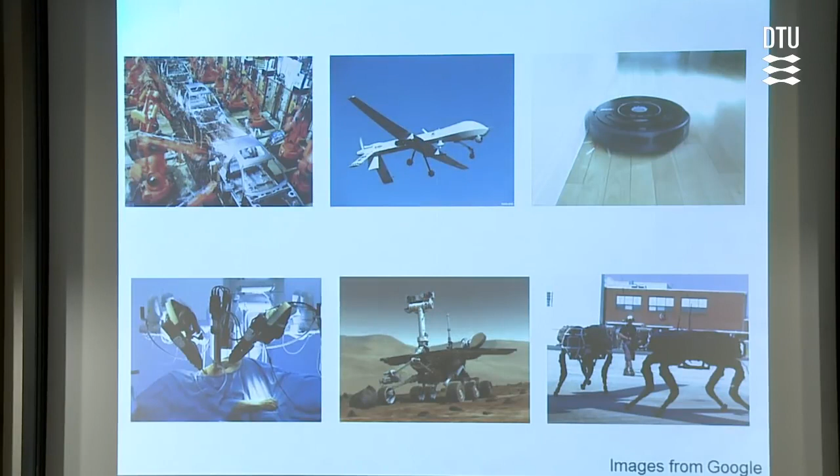Here are robots, and you're familiar with all of these in one fashion or another. Just a couple of points I want to make about them. This is an assembly line, and these are robots involved in the assembly. The characteristic of these systems is that you cannot come anywhere near them. There's a fence you don't see around this, but when one of these arms swings - it's accustomed to holding an automobile - if you happened to be there, it would go through you as if you weren't there and not even notice. So these are decidedly not collaborative.

The military has, of course, been very good at drones, and a drone is just an airborne robot. This is an effort to make a consumer robot - this is the so-called Roomba, which is an exceedingly stupid and inefficient way of trying to sweep the floor. This is a picture of the so-called Da Vinci surgical robot, which may or may not give better surgery, but it certainly enables higher billing. So it's a good thing in a capitalist universe.

This is a robot which is of entirely legitimate use. Human beings cannot presently go here, and I'm going to show you a little bit more about the equivalent of this in just a second. But I want to make this point before we begin - this has to do with the question of whether robots are intrinsically a bad idea.

I would point to early robots, otherwise known as machines - dishwashers and washing machines - which took half of the population, otherwise known as women, and released them from the task of washing dirty diapers and dirty dishes, and made them into teachers and CEOs and whatever they might be. So this was a case in which machines didn't compete but cooperated. They eliminated an unattractive job and replaced it with much more interesting and attractive jobs. So it can be good. It's a question of how you use these machines and how clever we are.

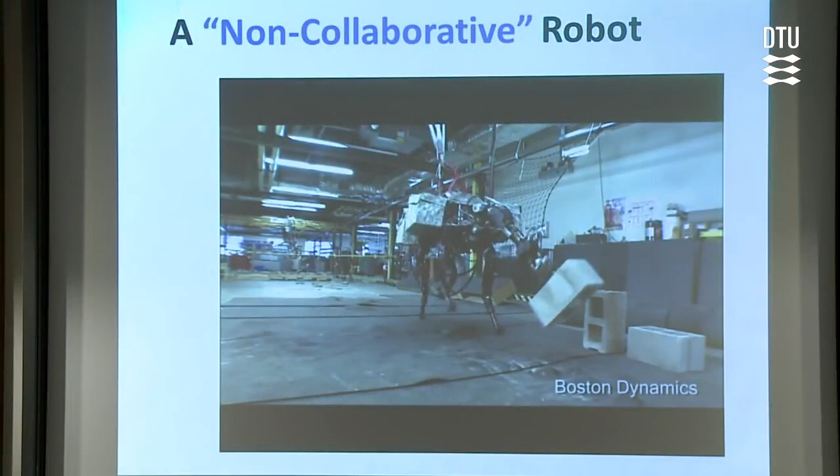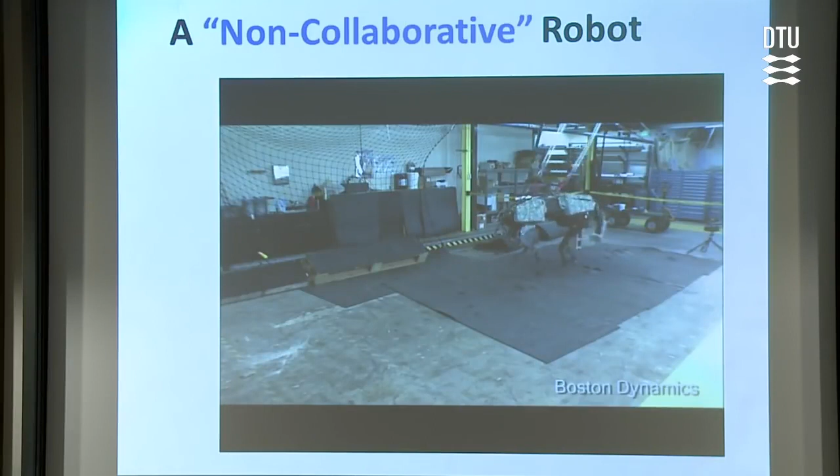This is not what you want as a babysitter. But there's a point here that I want you to look at carefully - look at the grace with which this thing balances, shifts its weight. It's just unbelievable. I mean, with my cataracts, I can't tell whether that's alive or not alive. It, in some ways, is better alive.

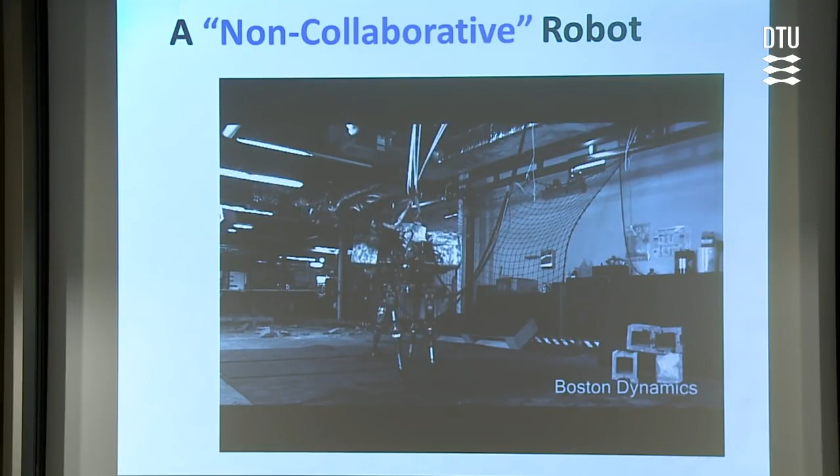But the underlying issue is that if you look at that kind of development - remember, that doesn't have a brain. All it has is a series of accelerometers and things of that kind. So without any control systems at all, other than the most primitive feedback loops, it does things that I can't tell are not something an animal does.

Now you take that and you couple it with artificial intelligence, and all of a sudden you begin to see a pathway to something - not next year, but something in the next 50 years - that begins to look a lot like us. There's a deep, really important underlying question here: if a system becomes sufficiently complicated that it has the power of advanced information processors, the knowledge of the web, the ability to move autonomously, the ability in various ways to improve itself, it can arguably be set on a pathway for independent evolution. I don't know whether this is going to happen, but I don't think it's just a question of trivial machines. It's more interesting than that.

So, here's where we started. Now you say, what on earth does that have to do with anything? With much of technology, it started with the military.

Our friends in DARPA were interested in developing a system that looked like a Coke can and would have the characteristic that on command, it would unfold into something that would autonomously walk across the floor, find a door, crawl under the door through the crack at the bottom, and then reassemble itself into something that looked like a Coke can on the other side. Now, you can see why they might be interested in that. You can understand that I might not be particularly interested in that, but many aspects of the technology of doing that have turned out to be very interesting and very practical to look at.

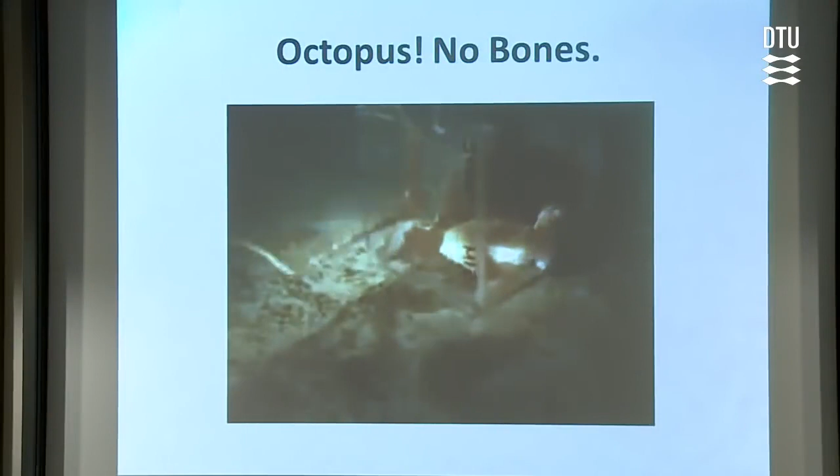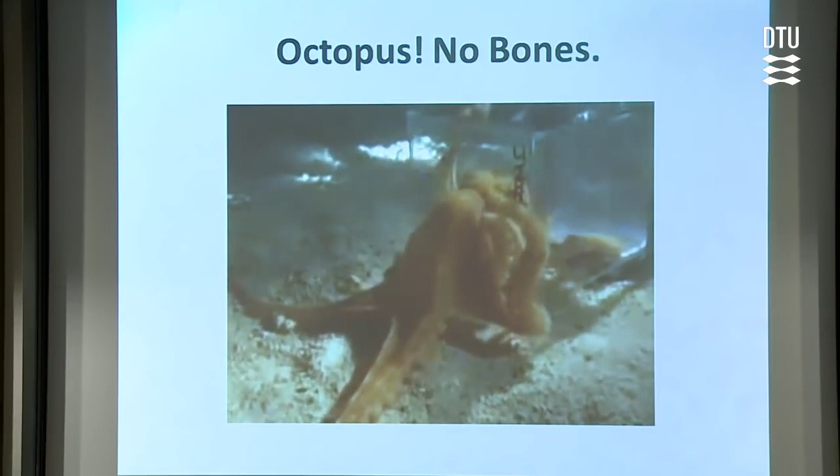Now, to do that, you need always a model, and here is our model. I just think this is among the most fabulous of organisms. This is an octopus, and this octopus is, as you can see, squeezing through a hole much smaller than the octopus, including squeezing its brain, which is apparently pretty plastic. And I would note that we couldn't do any of that, or at least not without severe damage. So here's something that can do something that we can't do.

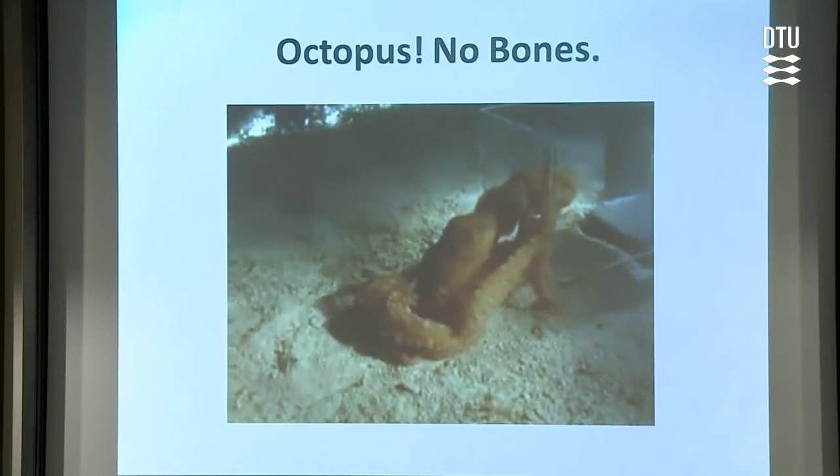And once it does it, I want you to finally see it's there. Look at that look of intense self-satisfaction. But this is a model.

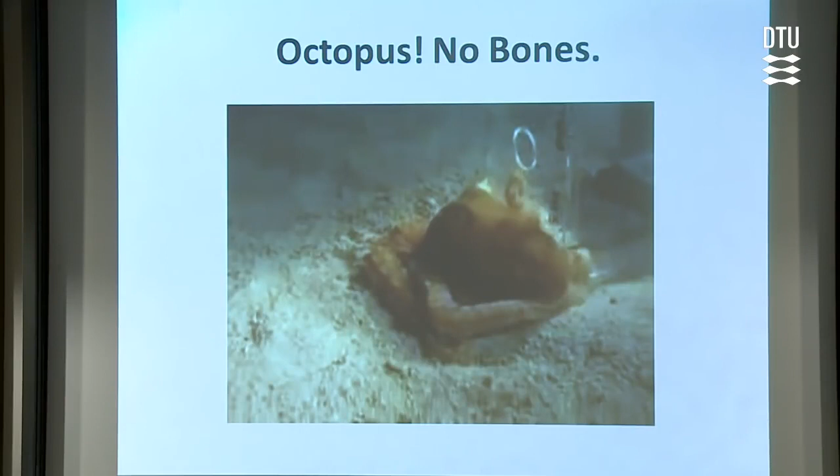The point in this is that the reason I have a skeleton and stuff like this is that I'm designed to withstand the forces of a gravitational field. An octopus doesn't need that because there's effectively no gravity if you're at buoyant density. But there's no real reason why I need that, except for the fact that this was an evolutionary solution. It could be done in other ways. So we're going to start with things that are fairly soft, but they nonetheless move around quite handsomely in a gravitational environment.

Here is the other of our motivations, and that's simply a bicep. It's not, for those of you who lift weights, a particularly impressive bicep. But the fact is that after 50 years of trying, there's nothing that really replicates the function of a muscle in the sense that it's a linear actuator that operates pretty rapidly, pretty efficiently, but doesn't in fact change volume very much. So we're interested in octopi and we're interested in muscles, not in replicating the mechanism of muscles, but the function of muscles.

Now let me start with this picture, which illustrates a lot of what's going on. That is a raw egg down there, and this is an early gripper. This was the very first thing that we published in this area, just to give you a sense of timeline, which is 2011. And the technology itself is as simple as it could possibly be. It's simply, effectively, a balloon over here, an elastomer with an empty chamber on the inside. You pressurize it, and if there is a layer here that has the characteristic that it can bend but not stretch, as this expands in volume, it causes that to bend. A really trivial idea.

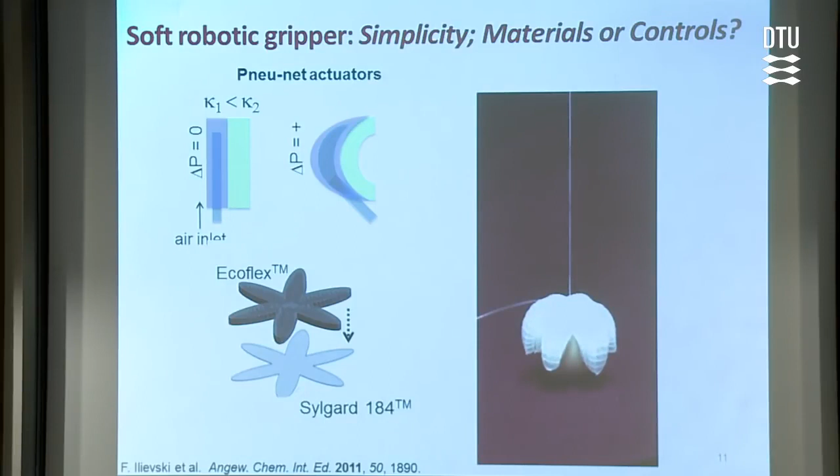We make this in a straightforward process that I'll show you in a moment. But what's neat about this is just to pick it up and lower it, and this is the input line for pneumatic pressure here. When this thing wraps itself around, it's very hard to get a hard robot to do because you have to have sensors that tell you that you're not breaking the crush strength of the shell. But here, because the pressure is distributed uniformly across all the contact area, all you have to do is regulate one pressure, which is the input pressure, and you're done. It's a first step in something really interesting, which is what it does is use the properties of materials and design to replace complex sensors, feedback loops, and controllers. So it's a device which simplifies the technology.

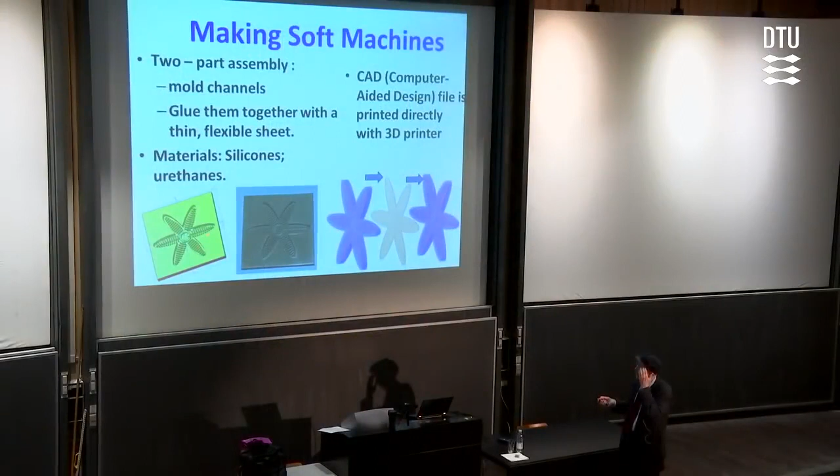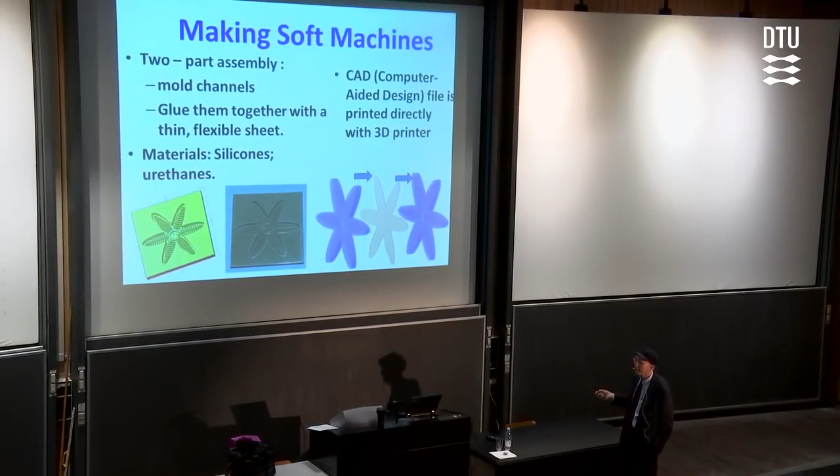So how do we make it? A lot of this came out of our work in microfluidics. What we do is simply design a mold, which in our case usually contains a number of small chambers, little bubbles, for a variety of reasons. We print it using a 3D printer. This might take a day for a complex mold. But then we mold a flexible silicone rubber against that. We put in some kind of layer that gives us the kinds of mechanical properties that we want. We glue these together with a bottom on it, and it's done. So it takes essentially no brains to do it. We like things with no brains.

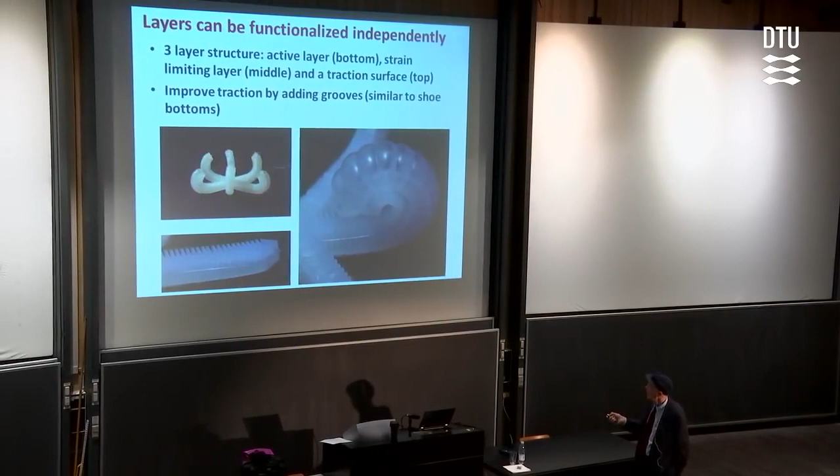I want to give you a hint of something. As this gripper blows up, you can see the little chambers that represent the arm here. But the other thing I want you to look at is it starts to curl up from the end even though the pressure is uniform throughout that system. And why does that happen? There's actually very interesting science associated with that.

It's also easy to take these things and mold on the inside structures of that kind which improve adhesion, if you want to do that. It's a very flexible technology.

Now there are other things that make it interesting, and here's one. This is a related structure, the same kind of thing, but now in the shape of a hand. It comes down and grips the egg, and we've made this a little bit more complicated in terms of internal structure. You can see the fingers are almost articulated, they have a joint-like activity. It puts it down without crushing it, and that's all fine. It gets its finger stuck there, but not to worry about.

But here's the thing that's more interesting. This differentiates it from hard robots. That's a mallet. And you pound on it, and this would break a hard robot of that sort, but just to give you a sense that this is real, after you do that it works just fine. In fact, these are sufficiently light that you can throw them off an arbitrary building. It doesn't make any difference, they're undamaged. They never reach a velocity that will cause impact damage on them. So they're essentially unbreakable to most blunt trauma. They can be cut without much trouble. Hard robots can't be cut, but they're very, very easily damaged by blunt trauma.

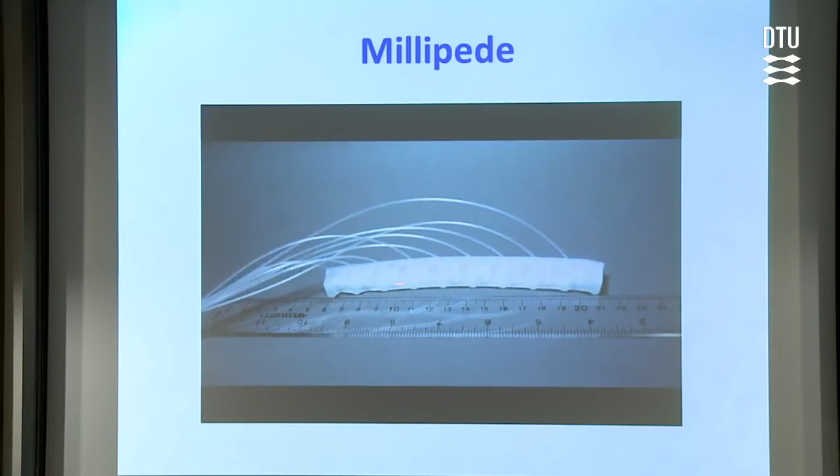And then you can make a whole bunch of other things. Here's something which is a millipede-like object, and here's an example for those of you who like problems, which is neat. We do this by pressurizing each one of these in turn. How would you make this all work with just one input here? And the answer is, we don't know right now.

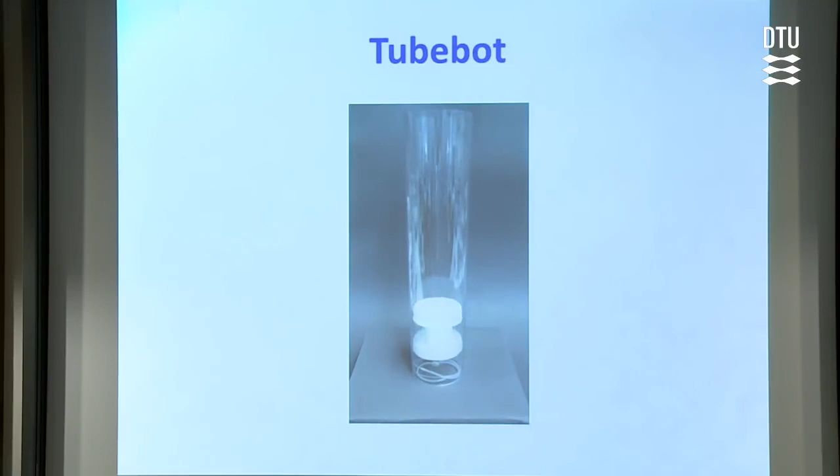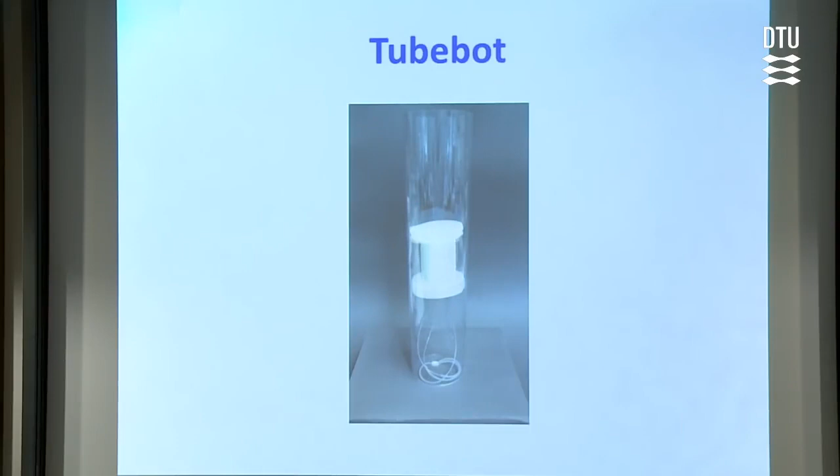Here is another device which enables you to crawl up the inside of a tube, if you want to crawl up the inside of a tube. Perhaps you don't want to, but this is doubtless useful for something. There are people already trying to think about using these to clean out sewers and pipelines and things like that.

Now these are all widgets which are pretty interesting. I want to talk about one bit of mechanics here, and it has to do with two components. One is what's called snap-through, which is a bistability, and you see that in little things that kids have - a sort of a bubble shape, and you push on it, it pops through to the other side. Both are stable, but they're metastable in either phase. So I want to briefly talk about snap-through and then also about beam buckling. This is much more sophisticated and quite interesting, actually. It's got the mechanics people all excited.

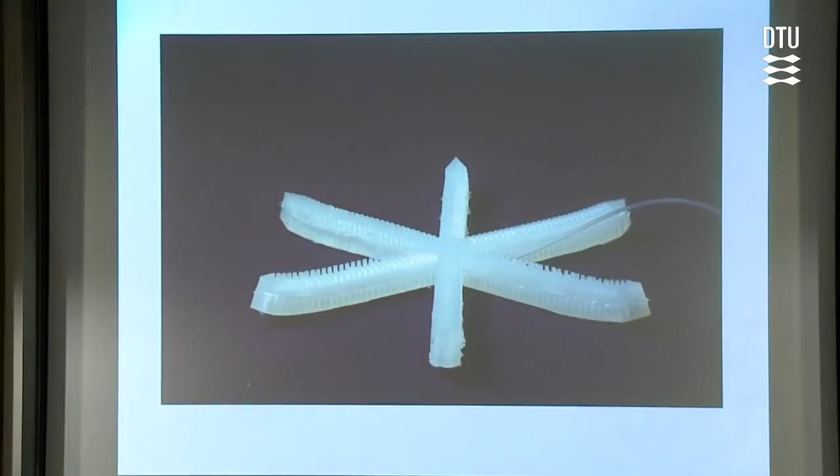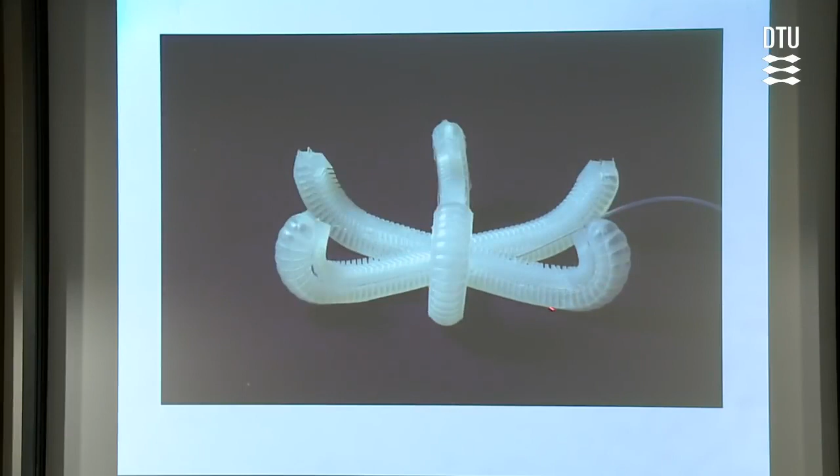So what's going on here? This is an example of snap-through. What happens here is that as you pressurize this structure, the pieces at the end expand all the way before the ones in here do. So you have a system in which you pressurize this entire arm, but because of an instability in the system, the pressurization here leads to curling before the system here curls.

This is, again, an example of using design and materials to get around the problems that you would have with conventional controllers. Trying to achieve a motion of that complexity with electric motors and reels and things of this sort would be a major problem. Here it's just a trivial outcome of the basic design. And all of this, incidentally, you can vary these properties by varying the mechanical properties of this and the structure of the pneumatic chambers and things of that kind.

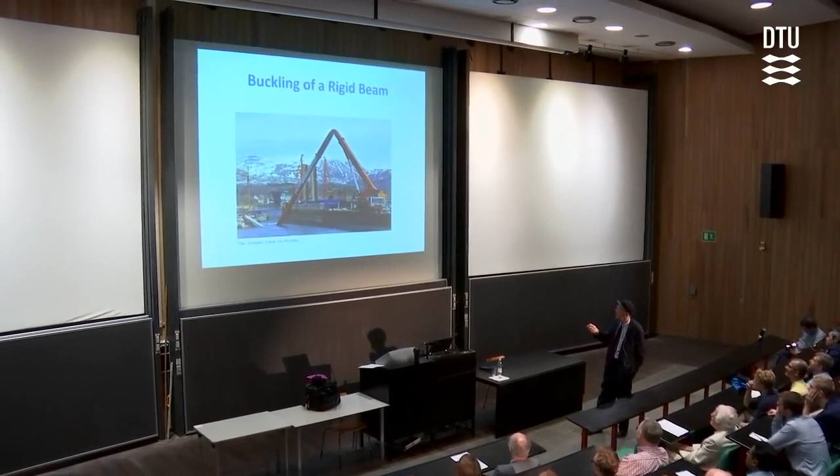Now here's an example of beam buckling. And this was apparently - you can see over here - this was a heavy lift crane, which I would suspect somebody got a little bit more ambitious than they should and picked up something which caused it to buckle at that point.

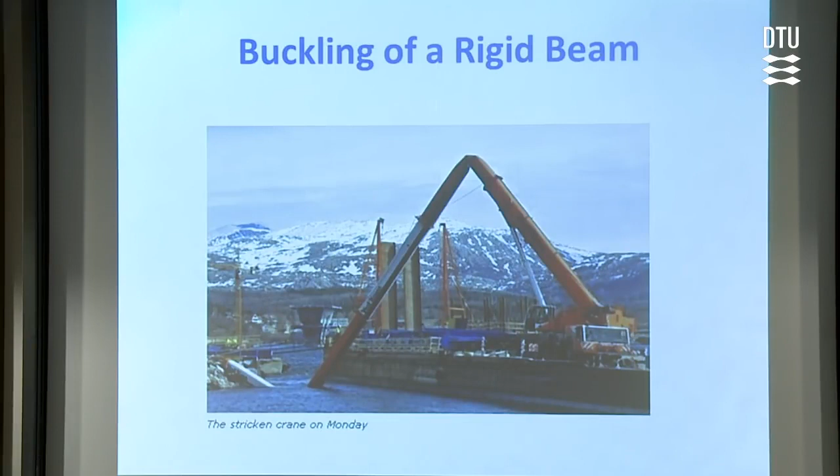What's characteristic of this with a rigid material is once it's buckled, it's failed. You see this in concrete pillars. You push and push and nothing happens, and then it buckles, and when it's buckled, it's failed. With elastomers, that doesn't happen.

Now, I don't know what's going to happen when I do that. Let me go back and find this on my computer.

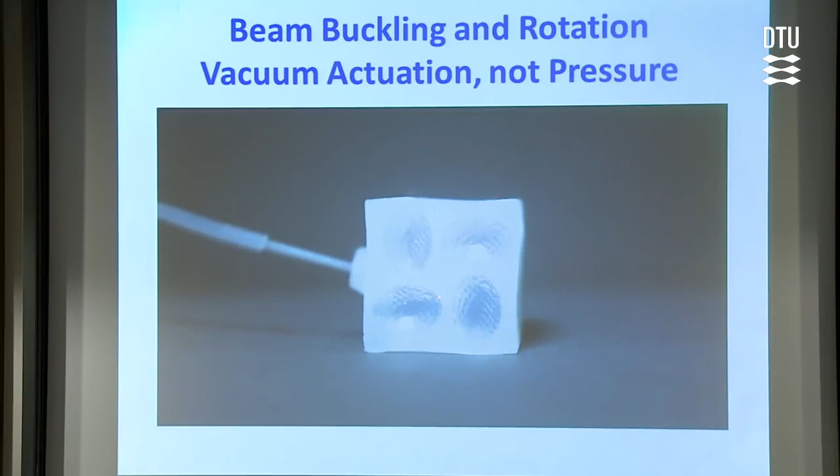So what you're seeing here is a rotary motion. I've converted the linear motion I showed in other things into a rotary motion. And you can begin to do all kinds of interesting things with this.

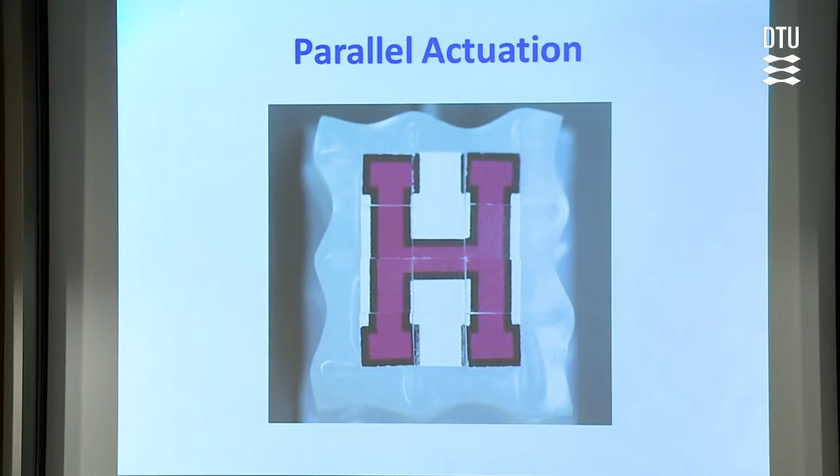I'll show you one here. This is a single input, a single source of vacuum, leading to massively parallel motion, which in this case orients a bunch of disks or plaques. This would be very hard to do in a system as simple as this one if it were rigid. So by this kind of beam buckling, it's possible to get some very interesting structures.

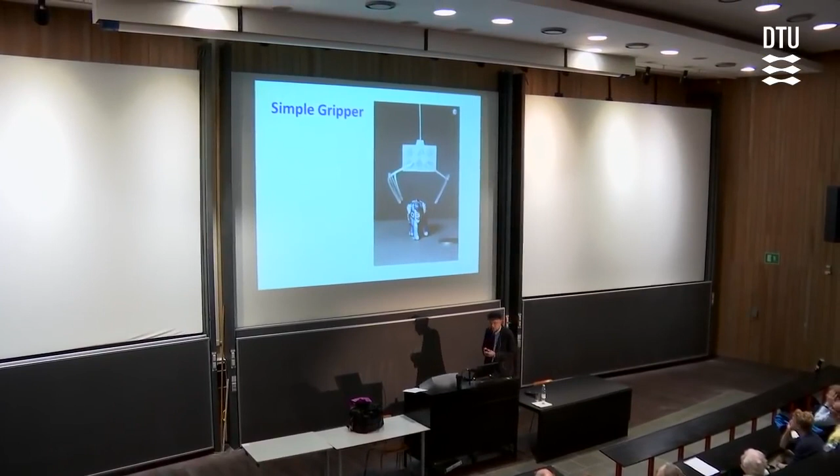Here's another one. This one again requires this. The reason for pausing on this is that what you see here, this part is going to rotate in that direction, and this part is going to rotate in that direction, because of the symmetry of this series of holes here with ellipses of different orientation. When you do that, what happens with a single vacuum input is this.

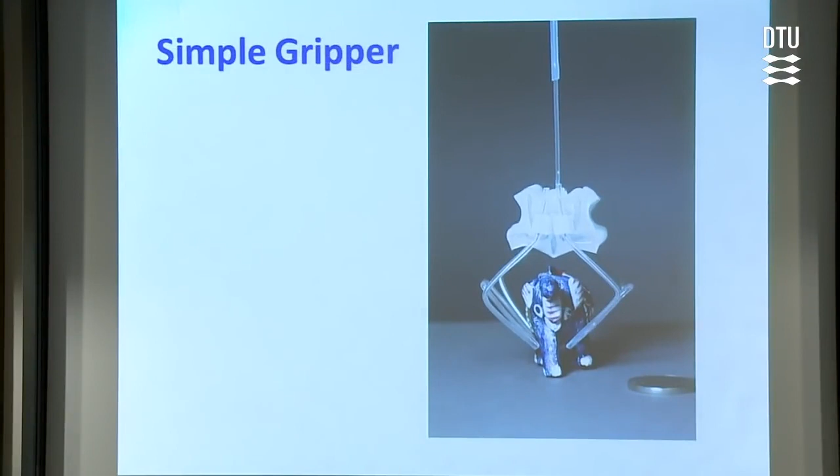Collapses, grabs, and picks up. So, quite a sophisticated motion for just one pressure.

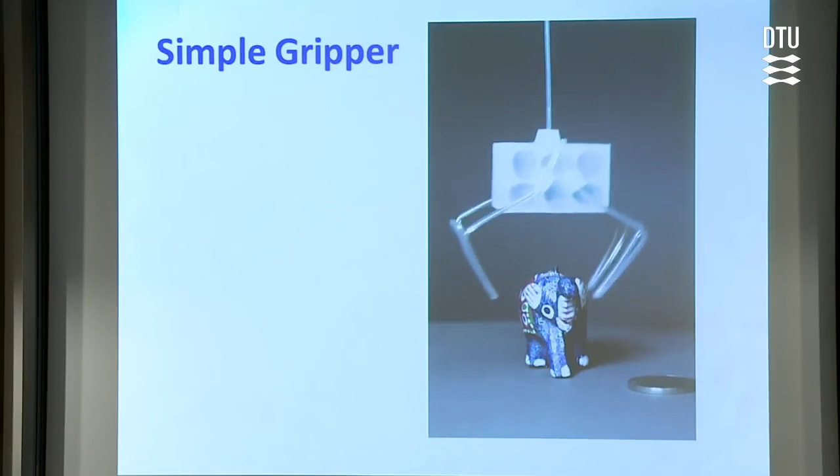And the nice thing about negative pressure is that it's prototypically cooperative because it can't blow up — you're just sucking in. So you can have this kind of thing embedded in you, and there's really no risk of exceeding an overpressure and having it explode in your abdomen. Not a good idea, but this just can't do it. So it's intrinsically safe.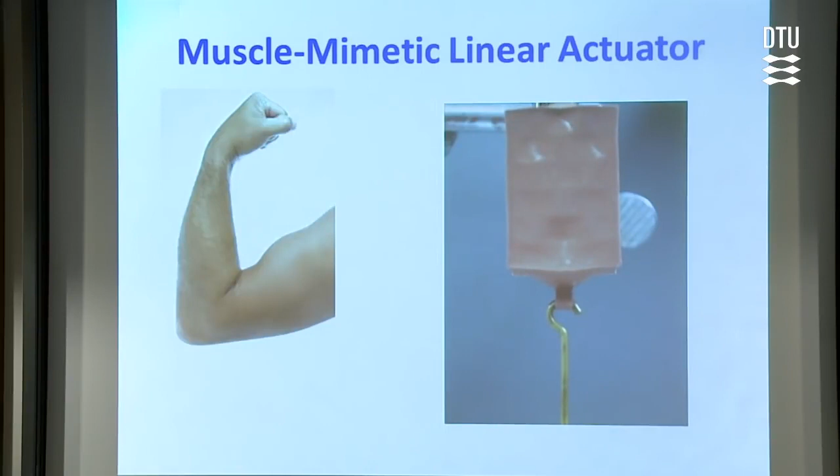If you pause for a second and look at the structures here — I should have that loop, but that's okay — what they are is a series of beams that are again buckling. The beam connection may be a little unclear, but this can be considered as an ensemble of buckling beams. Now, some examples.

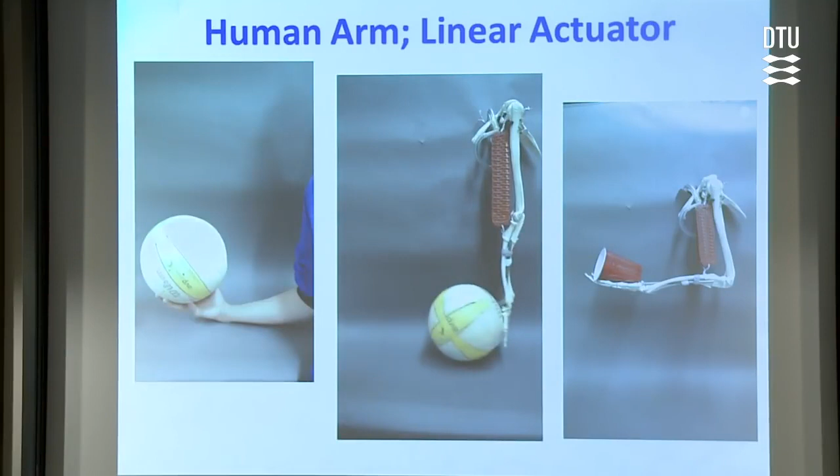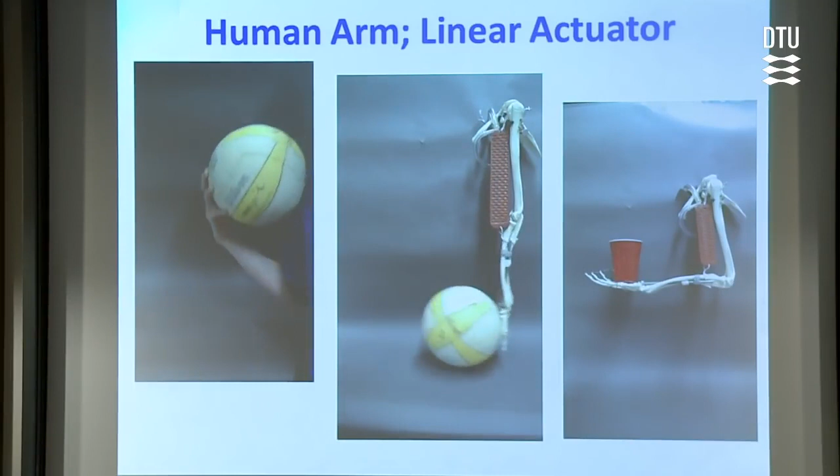And it only took a couple of tries to do that, but technical details. But this is really quite interesting because if you look at the mechanical performance of this, it's not really very different than that. It's about a third the speed, but we can actually have the same speed that we have with Josh Lessing. It's about the same efficiency, maybe 50% less, and it will lift about the same weight. So it's essentially the functional equivalent of muscle. Now, not the biological equivalent, but the functional equivalent.

Now, applications. And I'm a big believer that applications focus the mind. So I'm going to talk about four. One is to show you some work that's been done by a company named Soft Robotics, which was founded on the basis of this. And I want to make a remark about this. Well, let me just show you the other examples first. I'm going to talk about some further biomimetic structures.

I'm going to talk about a topic that we're very interested in called life that never was, by which I mean, if you look around, there are certain kinds of motions that creatures use to move around with, but you could imagine a lot of others, and why aren't they used? And it's now easy enough to make models of things that we can examine the question of why weren't some of these alternatives used? And then the last one is some examples in biomedicine. And let me just pause to comment about this first one.

My good friend and ex-student, David Walt, was one of the founders of a company called Illumina. And those of you who are biologists will have heard of Illumina. Illumina makes all of the boxes that are basically used. 80% of the gene sequencing is done with Illumina sequencers. And I was at a meeting once, and some student raised her hand and said, Professor Walt, we know you continue to work on this, and we know that you're also doing things with proteins, and how do you avoid the conflict of interest in your laboratory by having both a company and having a laboratory activity? He says, there's no problem.

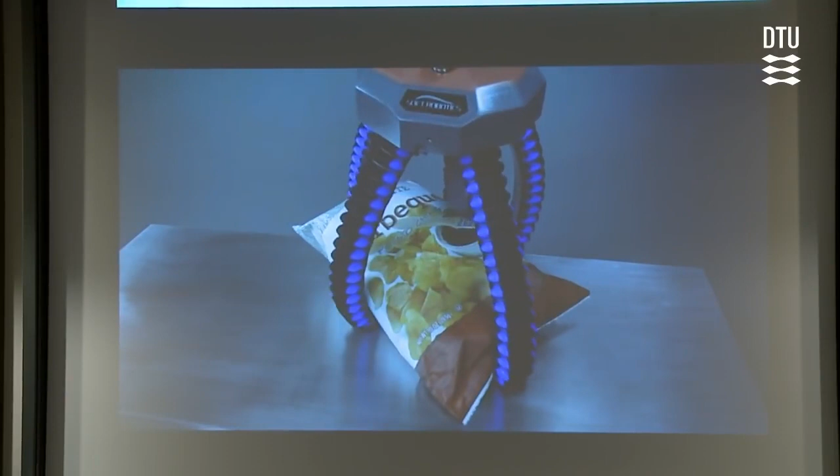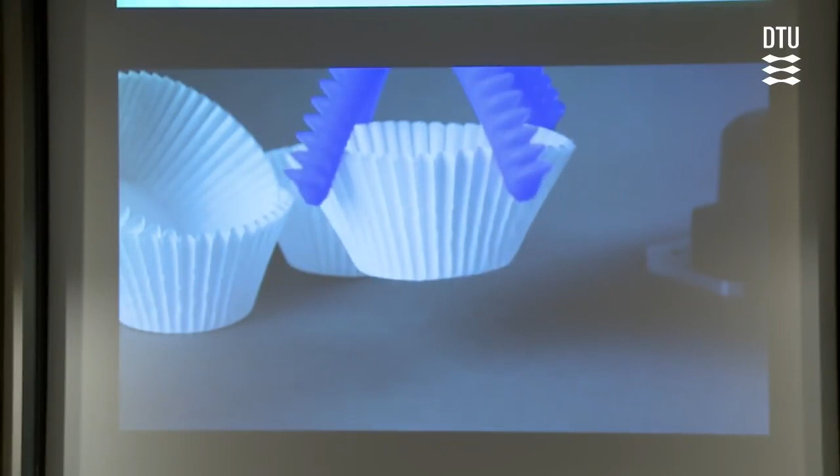Here is a Soft Robotics gripper picking up a pumpkin. Here is a Soft Robotics gripper picking up potato chips. Very hard to do with hard robots because they crush the potato chips or they don't have the strength to pick up the other thing. This is fruit picking, and the idea here is how do you get around the difficulties of being a farm worker? Here is picking up something which is a very fragile object, and then the everyday task which we all experience of picking up a cactus and putting the cactus down. I mean, I won't ask how many of you do that every morning.

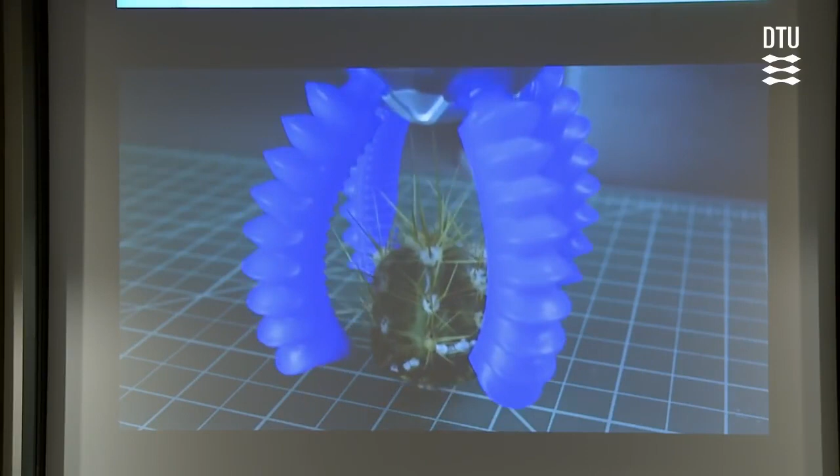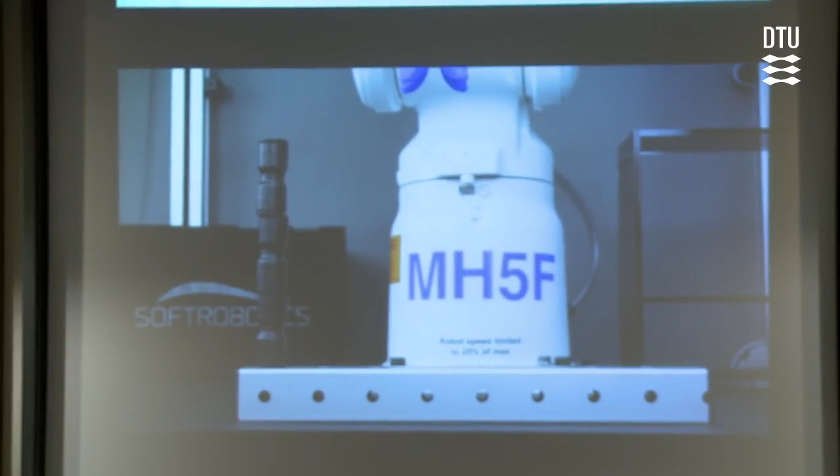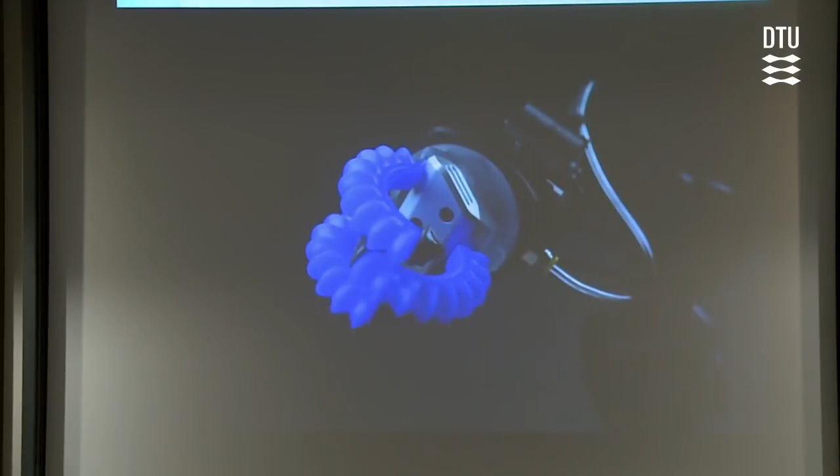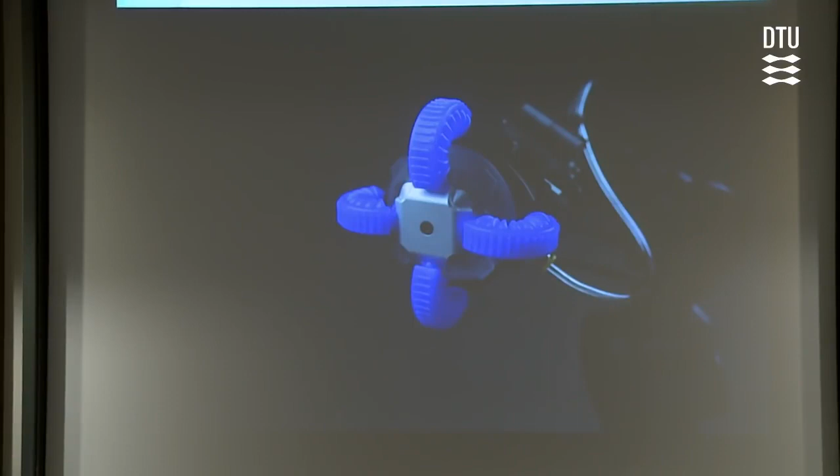And then here are some agility tests, and you notice this is positioned on the end of a hard robot, and I think this will be the major use at the beginning. This is something which I actually quite like, and I'm told this only took 4 or 5 tries to do, catching the ball. But it's really not an easy thing to do with a hard robot. And here is another thing that's actually quite hard to do with hard robots. It's really easy to do here. Notice 3 fingers. You just pop it off because it's a magnetic couple and put on 4. And that's critically important if you're actually thinking about industrial applications because you have end effectors that are changed out all the time for these arms.

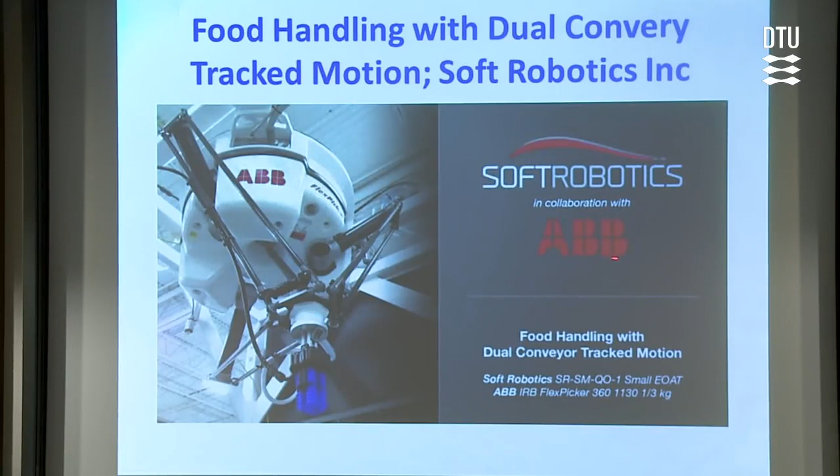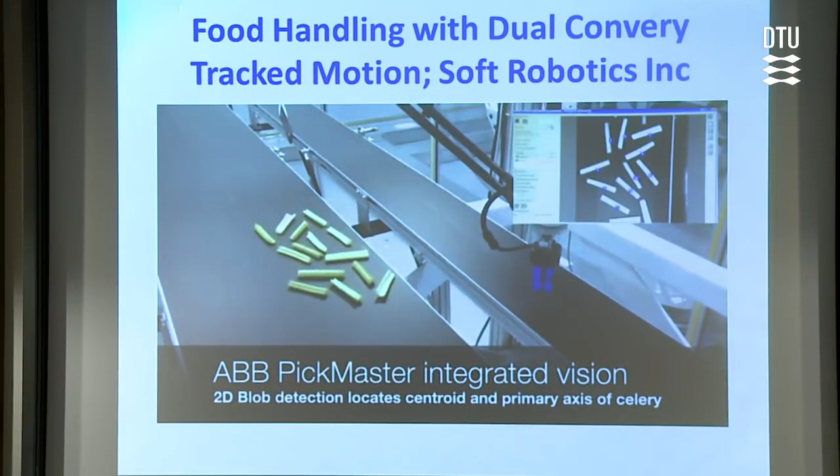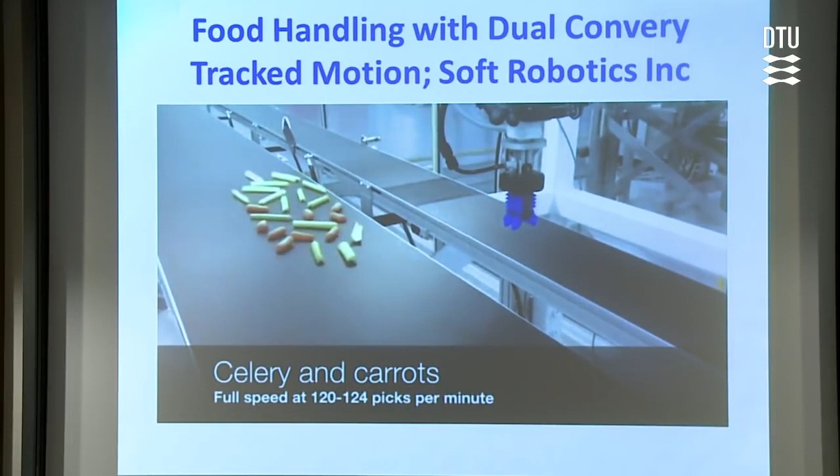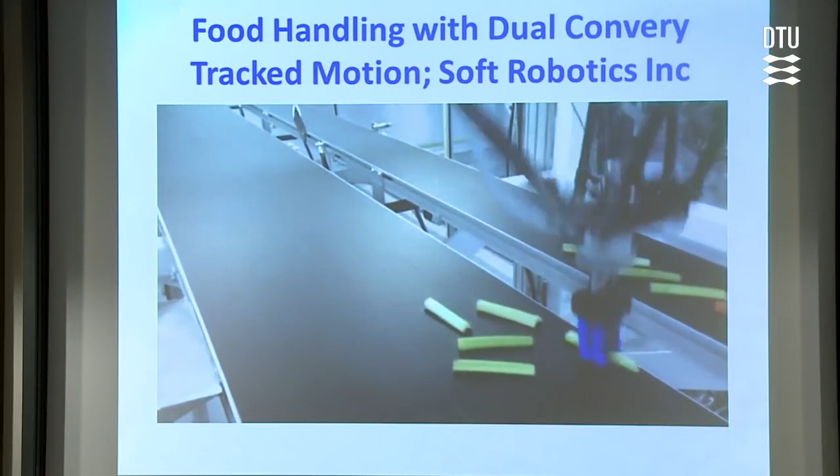Then here is another example using one of your next door neighbor's devices, and you can watch this thing move. It's really quite good. Here's celery. This is real speed, real time. And here it goes. And what the gripper is doing is adapting to the different shapes of the celery almost effortlessly because it's a soft gripper. So you don't have to have controls that watch everything in detail. You combine pre-existing vision systems and this amazing tripodal arm in order to achieve this kind of motion. And why do you do this? And the answer is that although you don't think of yourself this way, you are filthy.

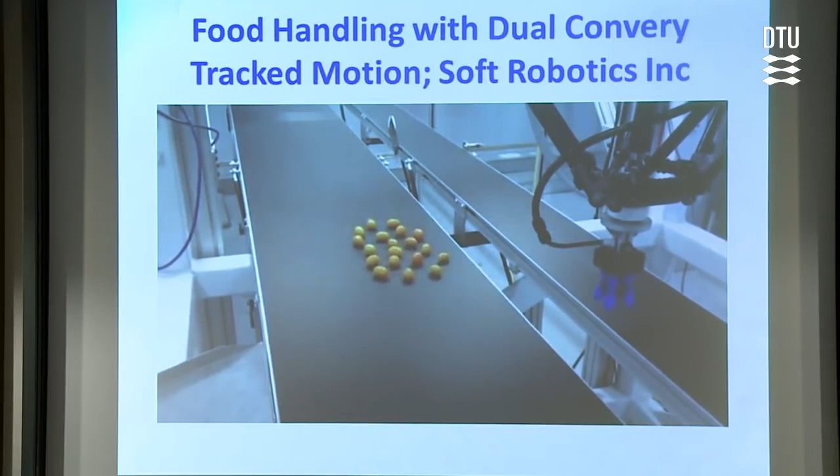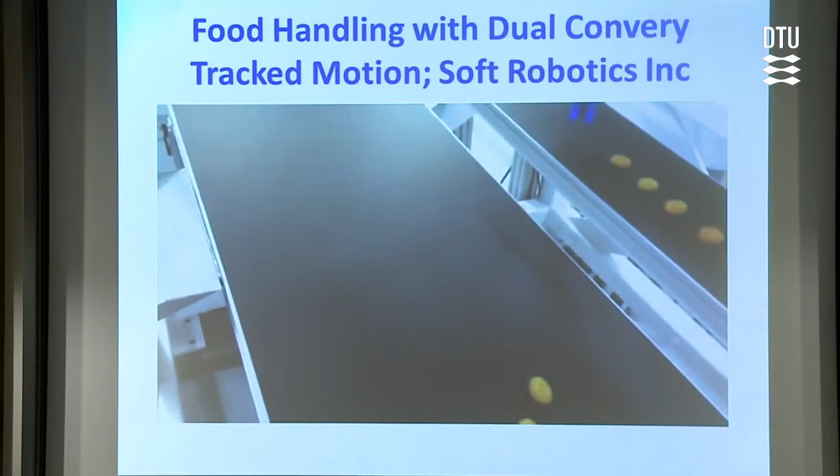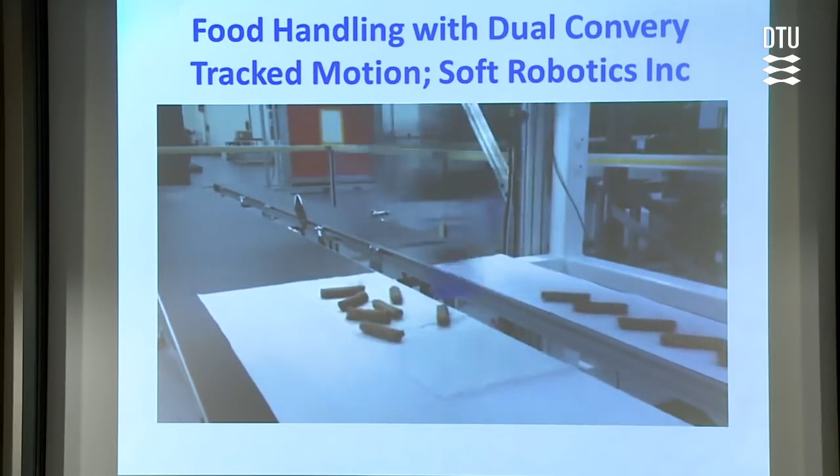And so if you are in an industrial food processing line, you may feel that you just have a minor cold, but actually it's the beginning of a norovirus infection, at which point 100 people get sick because you're just there, and the company that's involved loses 25% of its revenue for 1 quarter from that sector of the United States.

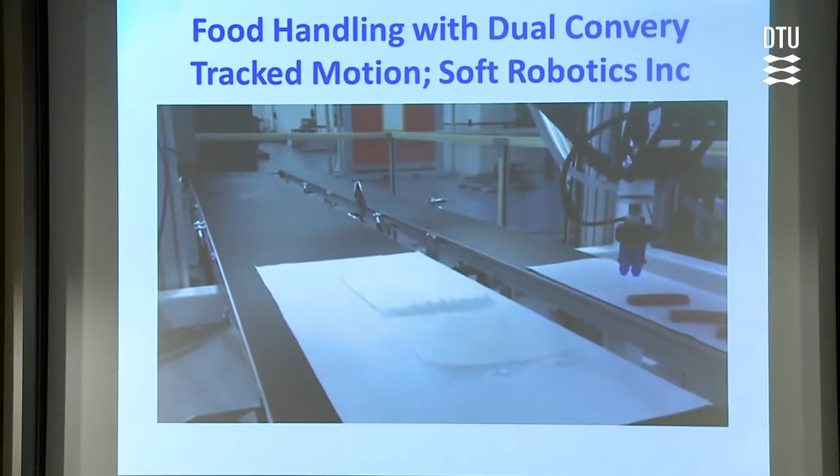So there's a very deep interest in the food processing industry to get people completely out of industrial food processing lines. And this solves one of the problems in that, which is to have something that has the characteristic that it's flexible enough to pick up food which is variable mechanical strength, variable shape, variable size. It's just easy because it's pneumatic.

Okay, now more biomimetics. This is one of my favorite animals. This is a spider. And although the spider is a very sophisticated creature, it has joints that are actually among the simplest of the arachnid joints. And the way this works is here, there's an exoskeletal part which is rigid, and there's an exoskeletal part here that's rigid. And then there's effectively a little balloon in here.

The natural relaxed state of a spider leg is curled up. And all of you have seen dead spiders, and dead spiders always have their legs curled. And the reason is that this tendon here naturally pulls it in this shape, and what the spider does is to pressurize the structure on the inside and expand it like that.

So this is a basic force diagram for a spider joint, and what we do is the same thing of using a rigid axial structure. We put in a little tension element here, which is an elastomeric tendon, and then here we have basically a balloon, and you'll see in a moment that this works quite nicely.

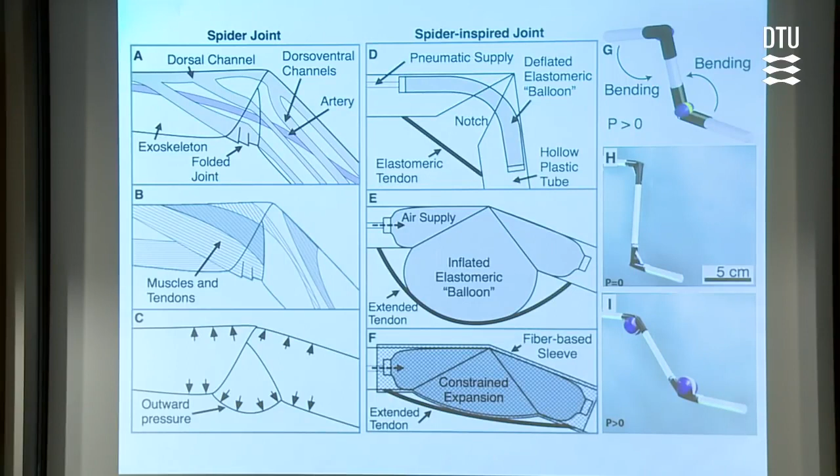I would also say that the basic sophisticated structural elements that we use here for these polymers are the same straws that you use for drinking soda. So I mean, it's cheap, it's really wonderful, and it's a circular cylinder beam, so they're very satisfactory.

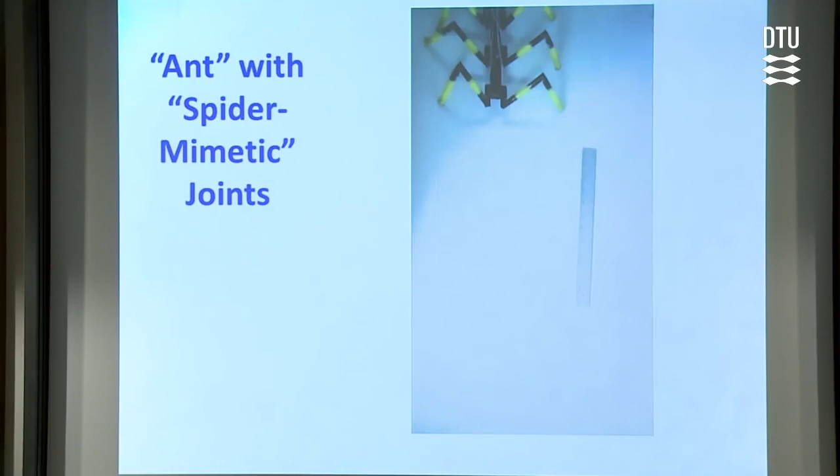So here is an ant. It happens to have spider legs, but notice the way the leg, at any point there are 3 feet on the ground. Let's do it again. Let's see what happens if, no, I know that's not going to work. At any point there are 3 feet on the ground, so it moves as a series of 2 triangles.

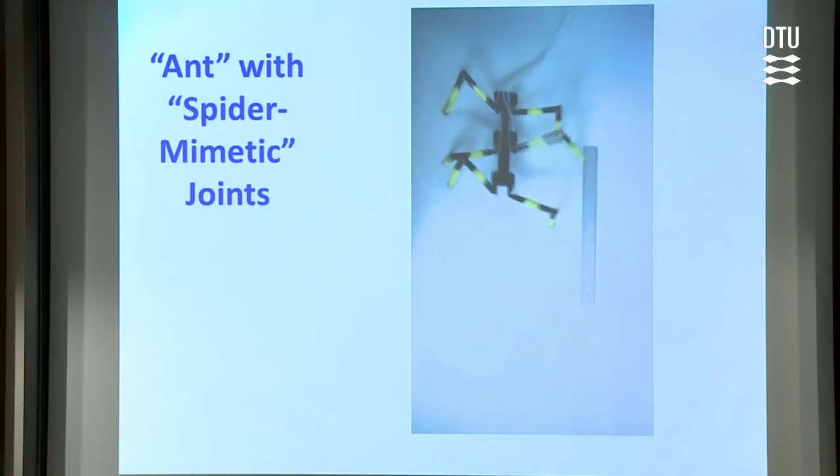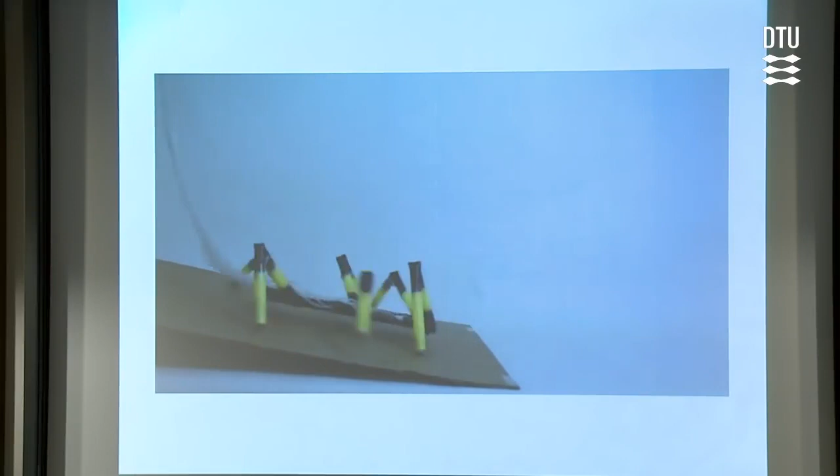And it's actually a very sophisticated motion which enables the thing to maintain stability over a wide variety of rough terrains. And we haven't spent that much time working on rough terrains, but here it is galloping uphill. So that's an example of a biomimetic structure.

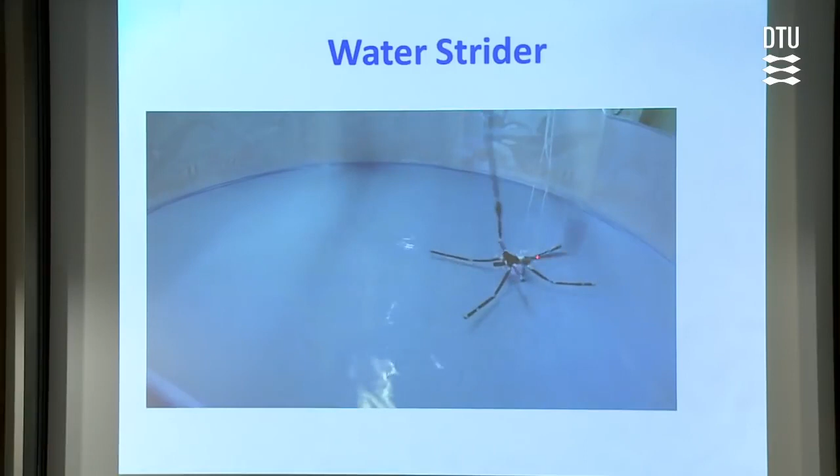Here's another biomimetic structure. This is a water strider. A water strider uses 4 of its legs to maintain balance and 2 of its legs to scull. And one of the characteristics of a water strider is it has to be light enough that it will stand on the surface of the water held up by surface tension, and this is. So does the world care about another water strider? And I don't care because I thought it was a nice demo.

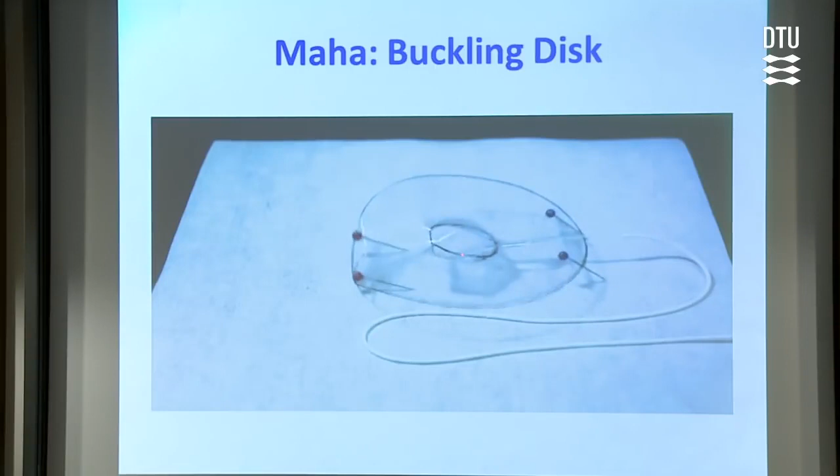This is actually a pretty interesting device. It's just an incompressible disc, and here we put a balloon. And as the balloon expands, it causes the disc to buckle. And this nonlinear motion here, the buckling motion, combined with legs, provides actually pretty good motion.

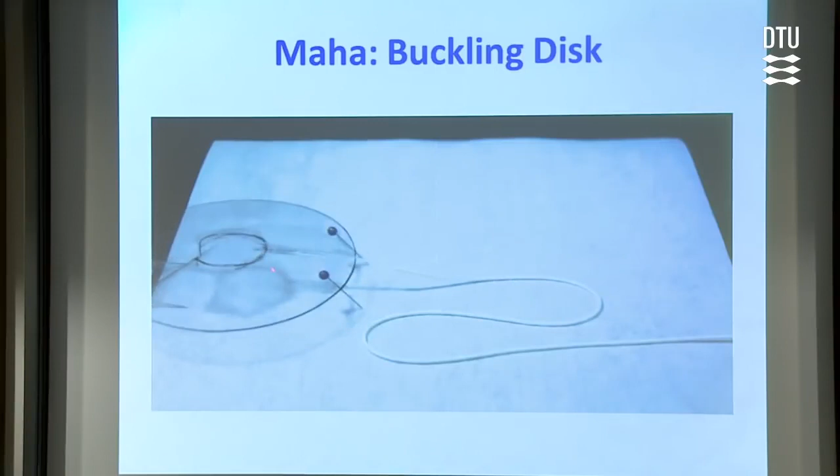And if you have 2 of these, I couldn't find the video, but if you have 2 of these, you can steer it quite well. So this is a perfectly practical way of doing things. Why this didn't occur during the Cambrian explosion, I don't know, but it doesn't seem to.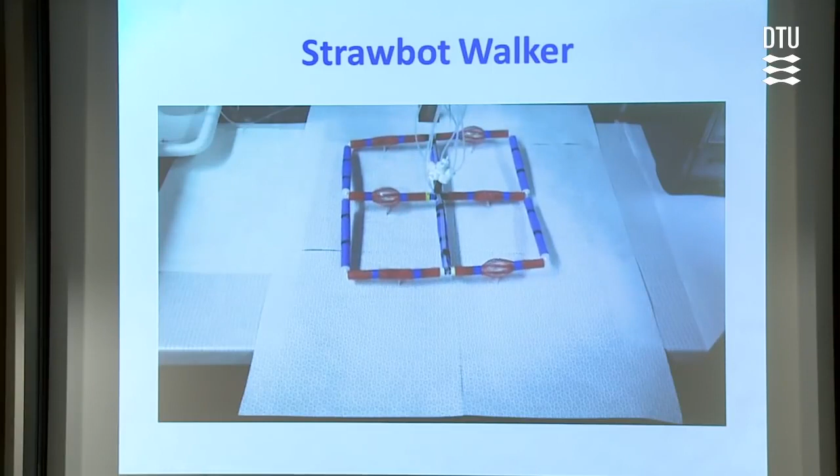And then if you look at this carefully, each one of these, as it expands, because there are rigid slits, the balloon expands, but it rotates. And because it's, again, the ant-like construction of 3 and 3, it manages to make its way forward. This must be among the least agile and beautiful walkers you've ever seen. But nonetheless, it works just fine. So you can explore these kinds of ideas.

And then the final thing is actually important. This is probably as important as the food handling and mechanics. And incidentally, the application for that first thing that I showed you of picking up potato chips and pumpkins and things of this kind, why would you ever want to do that? And the answer is you want to do that if you are working for Amazon and people go online, they buy potato chips and 5-kilo cans of lube oil and sweaters in slippery plastic bags. And so the idea for that is to replace people who do one of the world's most horrible jobs, which is packing boxes for Amazon.

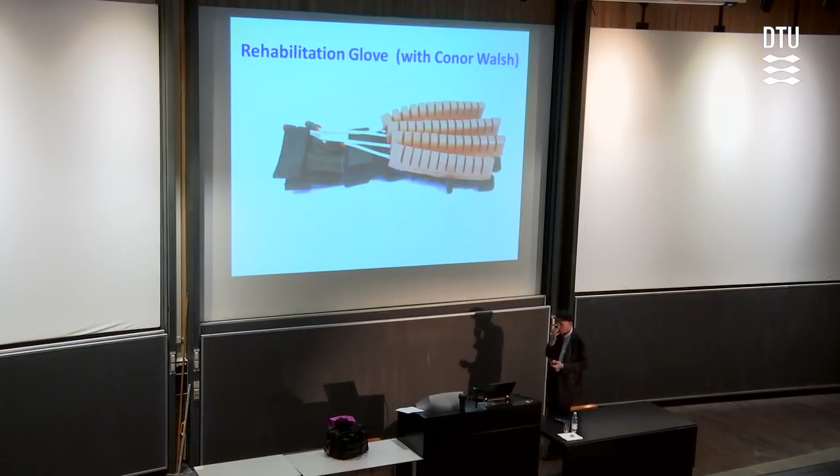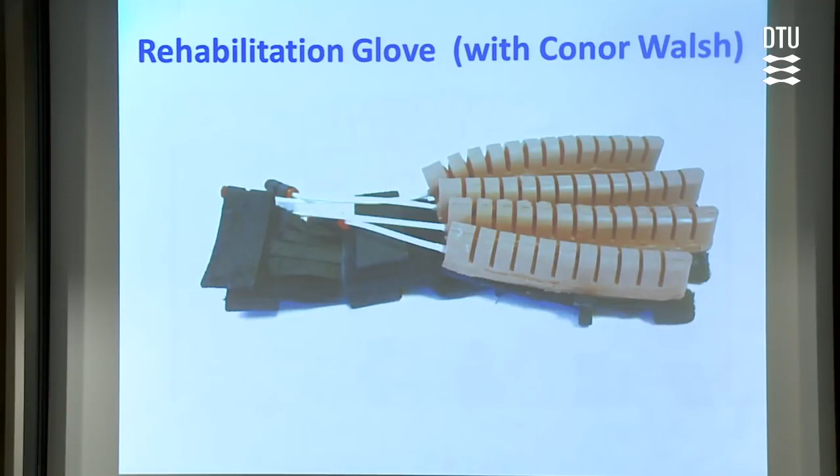So here's just an example of a system which will probably go into development pretty soon because it works. What we have here is just a glove that you buy from Sears and Roebuck, and we've put a simple bender on the outside here and it connects to a pressure source in this case. Could be done with a vacuum source if you want to do it in a different way. What happened to my cursor? Here we are. So you can see you move fingers.

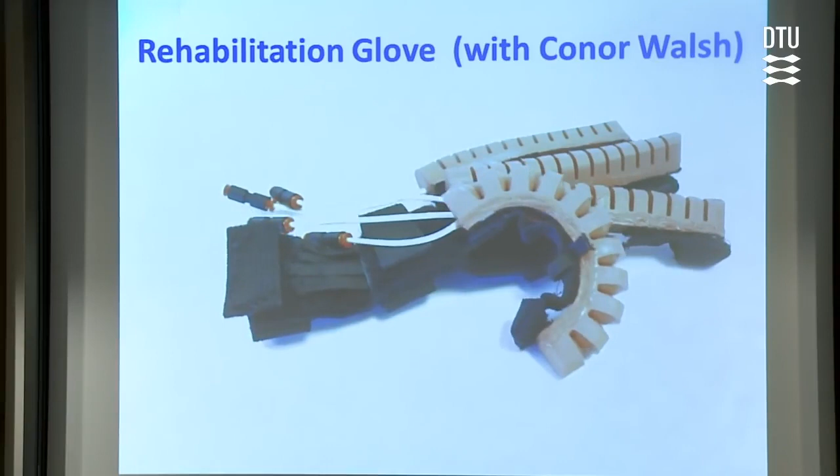Why do you care? As I said, an example of the use of this kind of thing is as aids to nurses. Surgeons get all kinds of care. Nurses don't get so much, even though they really run lots of the medical system. And one of the things you have to do if you're a nurse is the following. You are in a rehab unit. A patient comes in. The patient has had a stroke, and the stroke affects a hand. And it's critically important that that hand be manipulated to begin to return it to motion. Otherwise, you develop, as a patient, something called spasticity, in which everything freezes in place and you can't get it going again, ever, no matter what you do.

So it's really important to do that, but by the way, it's also not really very interesting to sit there and help somebody move their hand. This is a fine solution for that kind of problem because you can arrange it so the pressure and the timing is anything that you want. It's more convenient for the patient, it's more convenient for the nurse. It's probably just a better deal all around.

And you can also go one step further, which is that it turns out these are going to be, I think, very useful as assist devices. So if you've had a stroke, you may recover some motion, but not all of the motion. And you would like to have something where you get a little bit more strength to pick up an apple or a cup or whatever it might be. And this will provide that very gently. It just gives you a little bit more strength to hold on to things. And all it requires is a little compressor on a belt and some batteries. So I think there are going to be lots and lots of very useful uses of this kind of thing. So let me begin to summarize, first with some comments about soft robotics.

The first thing is that we do not think of soft robotics as competitors for hard robots. I think of them as supplementary, and there will be areas where there is competition because vast effort has gone into making hands with reels and electric motors and things of this sort. And there may be cases where hard hands are better, but I think in general soft hands are going to work better. They're much cheaper and they're more adaptable.

The second thing is collaboration is really important. If you talk to the people who make hard robots, they will freely admit that the big problem with hard robots is that they're non-collaborative and they don't have good mechanisms for making them collaborative. They're also pretty expensive for what you get. They're also very energy inefficient.

A pony-sized object that is a hard robot run by a motor will typically be about a factor of 100 less efficient than a pony will be. And why the biological systems are so much more efficient is not completely clear, at least not to me. It's an interesting basic problem in motion. So anyway, collaboration, being absolutely safe around people, is critically important. Cost is a big advantage of these soft systems. Lightweight means that they can operate in an unstable environment.

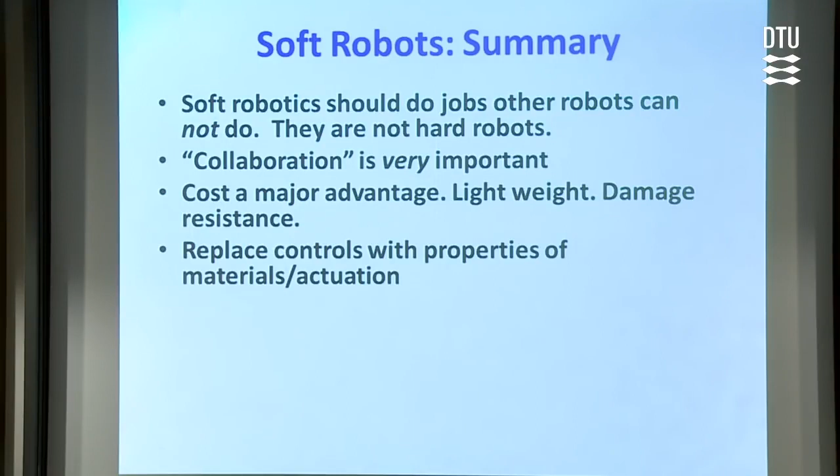A very interesting issue is that if you look at hard robotic systems, a lot of their cost is the control systems, and there will be applications with soft systems in which you also have to have controllers. But as I showed you, you can get conformal gripping of an irregular shaped thing, an apple or whatever it might be, with no controllers at all. You just have one pressure controller, and the materials do all the rest. And I think that's very interesting.

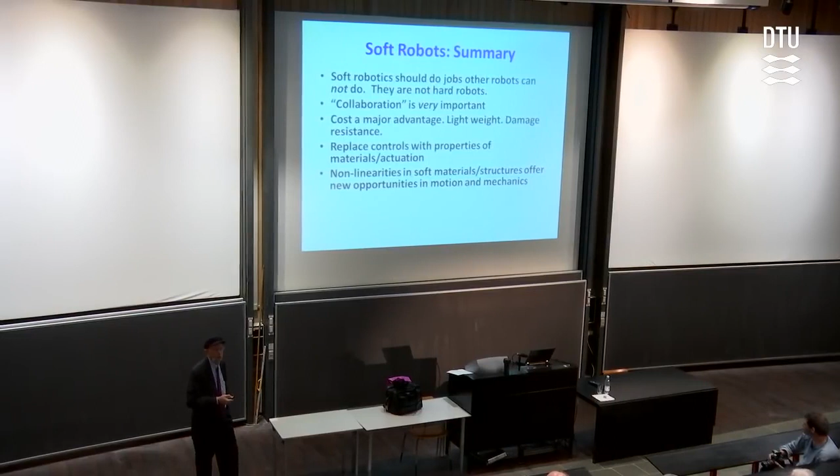And then I really believe that applications and products focus the mind. So surgery and rehab and prostheses we've talked about, agriculture, both food picking and food handling. I haven't talked about search and rescue, but I'll touch on that in just a moment.

Single use - you send a robot into Fukushima to have a look around and see what's going on. By the time it's been there, it's so radioactive that you don't want to get it back. But you can't afford to send a stream of $50,000 robots in and throw them away. These, it makes no difference. You couldn't care less. You could make them for $50. Hazardous tasks, all of these kinds of things, I think are legitimate applications for soft robotics.

Now, a couple of other things. One question is always, what next? Everything that I've showed you up to this point has involved rubber with the same general sort of elastic properties as rubber bands. We don't actually use rubber bands because they oxidize, but PDMS is an elastomer, and you can get pretty good elastomeric strains on it.

This is a kind of elastomer I'm very interested in - automobile or bicycle tires - because the pressure that we use for most of the grippers that I showed you was about half an atmosphere, so 7 pounds per square inch. You'd say that doesn't sound like very much, but that's the difference in pressure between the top and the bottom of a 747 wing when it's flying. It takes about half an atmosphere. And if you estimate the number of square inches in the wings and the difference in pressure, you end up with about a million pounds that can pick up.